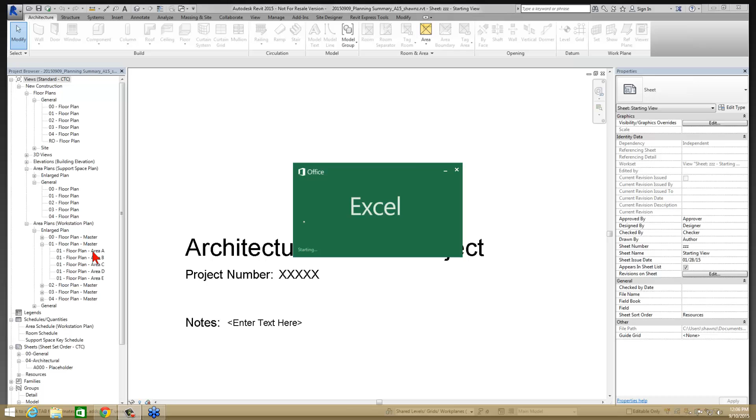Here I've got this single level summary of how many workstations I've got in my model. The intent here, I believe, is to size these workstations approximately to these square footage sizes. I've done that already in my Revit model—what I'm using actually is areas for this exercise.

I'm going to place a number of these around my model. I've got kind of a garbage model I've put together for today's purposes, and I can drop in as many of these as I want. My goal here is for the quantity on plan portion—I want to automatically extract this based on whatever individual workstation I'm dealing with, whether it's a little hoteling station, a small stand-up station, or other more refined types that are temporary, small, or more permanent office type spaces. So I want to get a quantity of how many I have in my project.

I also want to know how many have been put into my program—what is the client expecting for the quantity of those spaces? And then I want to know how I'm actually lining up with that, what my variance happens to be. This particular spreadsheet was, again, the one provided by my client—they formatted this.

Now down below, there's also some other types of supporting spaces. These are not necessarily workstations—these are actual square footages on rooms, I believe. So on the top portion I'm going to extract a quantity of how many spaces or workstations I have. On the bottom, I'm going to extract actual physical square footages, total square footages of individual space types.

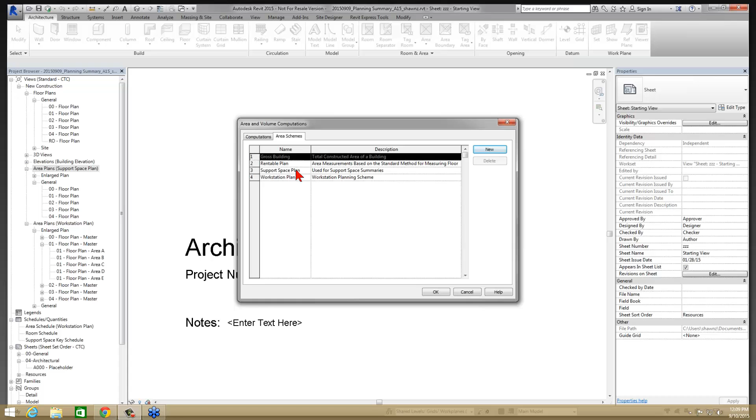What I have here is 2 different area plan types. I created this by going to Room and Area, Area and Volume Computations, and I created 2 area schemes. I created a support space plan. That particular plan is the information used by the square footage down here on the bottom.

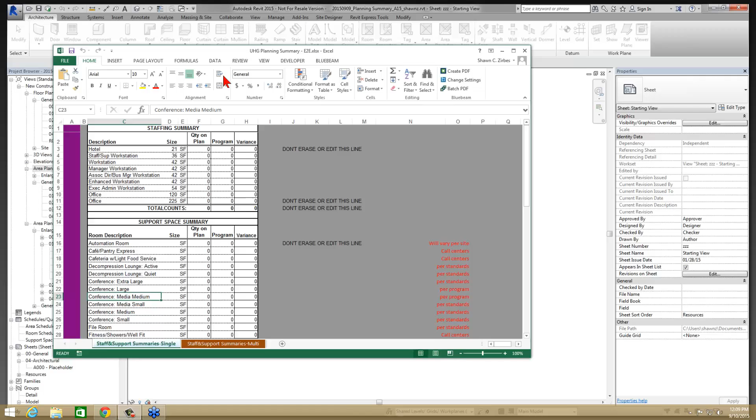The second one I created was a workstation plan. It's a different area plan, and it's very intentional—I created it differently. That's what's going to be used right here in my staffing summary for my quantities. Because they're areas, I can extract them all out to a single tab, and that's my intent. So those are my 2 different area schemes I'm working with today.

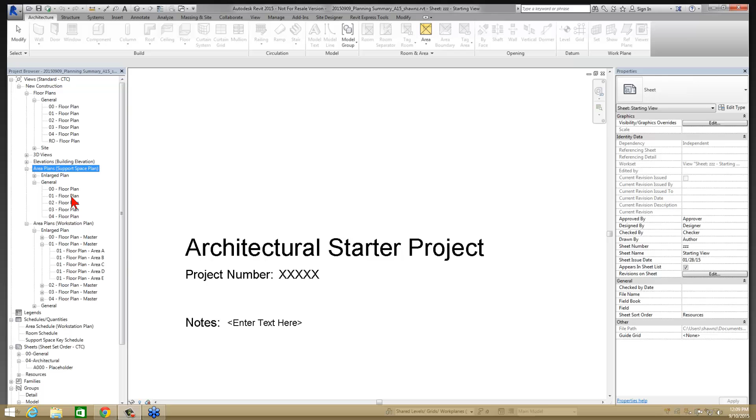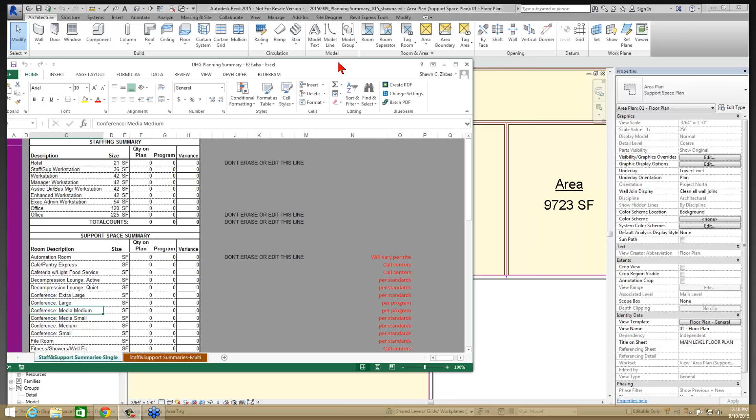I've already created the floor plans for this. Under my support space plan on level 1, I have a bunch of areas dropped out here, with names placed inside these different areas. If you look carefully, these names match up with the different types of names I've got out here—conference spaces, media medium, media small, large, or whatever type of space. In this case, conference medium, right down here.

I'm doing that with the schedule key inside of Revit. I've created a support space key schedule. My key is being used on the individual spaces themselves. Right here I am using my... no, sorry, wrong one. I'm using the area description right here—my area description is what I'm using.

As I change this, I have a preset list of area descriptions that matches up with my spreadsheet, and that drives what the actual name of the space or area happens to be. This is the value I'm going to use in my spreadsheet extraction—the name of the area consistently for both processes.

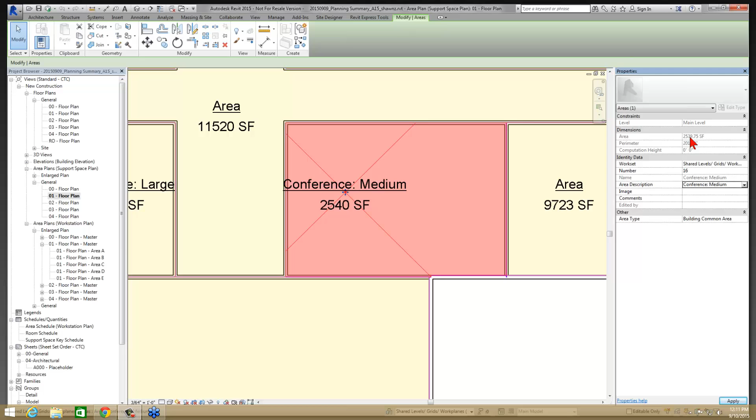I also have an actual square footage value in here, derived from whatever I've dropped this area into in my plan. So I've got some that are unnamed, just called area. I can refine those later on and make different choices—we'll see how that can work.

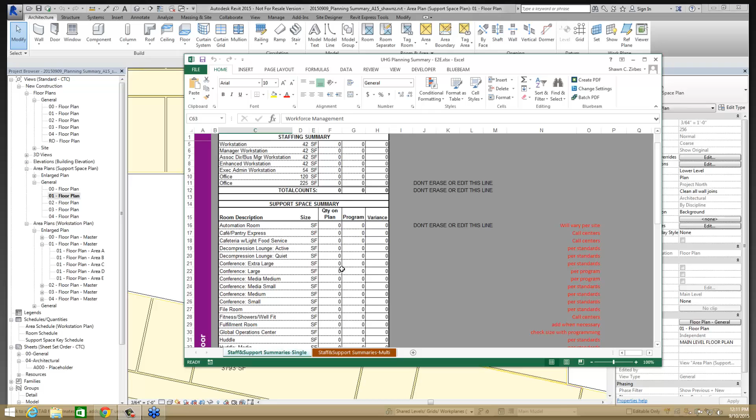I've got a huge lobby down here—I wasn't really checking the scale of this building as I was throwing it together. I've got a reception area, some workforce management, and all of those types of areas associate with these different support space summaries down here. So I've got things like lobby, workforce management—I've got those different types of areas down here, and I'm using this to extract these square footages on the lower portion and total them up.

Now on my other plan, I've got a workstation plan. What I've done is create some groups out here. If I look at these groups in my model groups, I've got like a workstation group, or an Office 2 type group, and those line up with some of the offices appearing in those different staffing summaries from my spreadsheet.

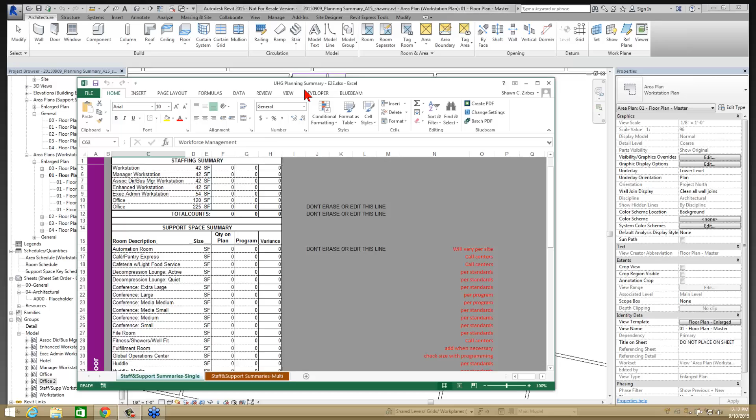Each of these individual groups line up and have a space inside them named the same as the individual staffing summary spaces for the different workstations. They have some boundary lines pre-included inside them. So I could simply take this hoteling station and drag and drop it into my project, drop it out there, and it actually creates the space itself—you can see an area inside there.

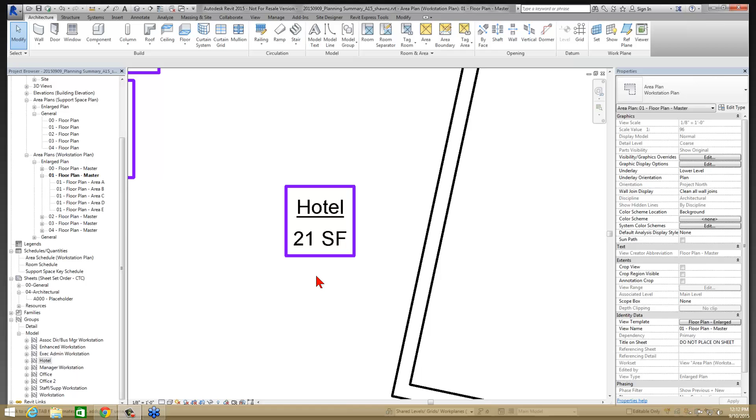It creates the boundary lines. It has a default size to it. I've also associated a group to this so I could have a tag pre-placed, so I can see this is a hotel station at approximately 21 square feet—matching up with what's in that spreadsheet. My intent was to make this as streamlined and smooth as possible for an end user to go out there and start bubble diagramming or dropping out specific workstations. For these ones, I don't care what the square footage is.

What I care about is how many of them I have in my project. So if I was to drop out an executive admin workstation, it's got a slightly different size. If I take office space number 2 and drop it out here randomly wherever I want, it has its own size and apparently a rotation as well, because I rotated it to match up with my building.

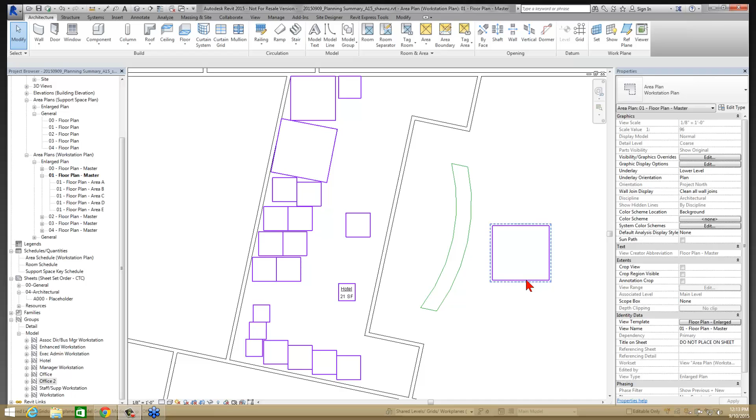So if I wanted to rotate this right now, kind of bring it back to square, take that and just rotate it to square, right? So I can do whatever I want with this. I can put these wherever I want, rotate them, get them placed. They all have, once again, different attached groups associated to them.

My goal here is ultimately to get a count of how many Office 2s or offices or whatever I actually have. Let's begin this extraction process now that I've taken you through what I have out here.

Now, some of these aren't labeled. I did that on purpose so you wouldn't be able to tell what they are. We're going to let Spreadsheet Link do all that totaling for us.

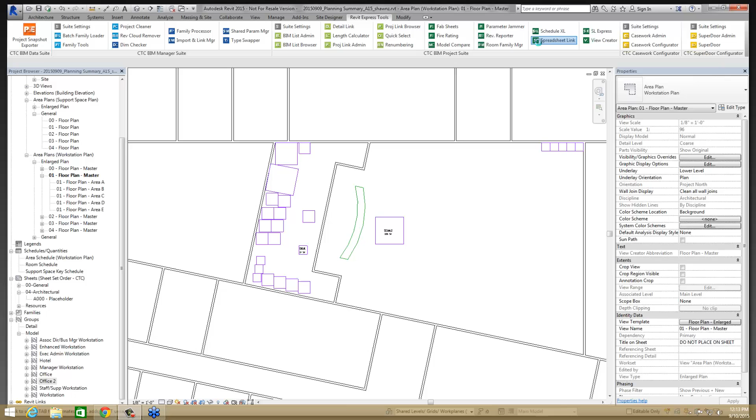So if I go over here to my Revit Express tools, my first step is going to be to open up Spreadsheet Link. In Spreadsheet Link, my second step is I'm going to open up a spreadsheet that's already been configured.

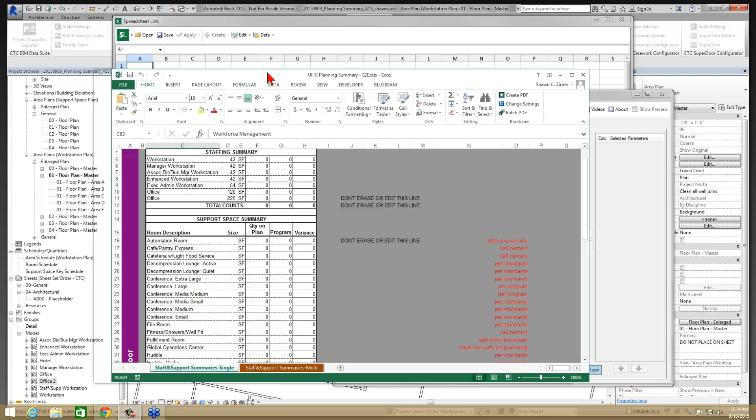So what I'm going to do is take that particular spreadsheet and do a quick save as on it. I'm going to take this UHG spreadsheet and save it, not save, save as, to my folder system out here.

I'm going to go to, where did I put this? Desktop. It's in my workflows folder, and I happen to have a folder set up for Spreadsheet Link called Planning Summary. Now I've already got a Planning Summary template sitting out here.

I'm going to steal this name and call it Planning Summary Template 2. We're going to come back and use this template in a minute to show you my automated workflow, since I probably won't get through the full configuration today for all the things I want to do, but I'll show you what the ultimate result happens to be if we don't get through it all. I'm going to go ahead and save this particular spreadsheet as template 2.

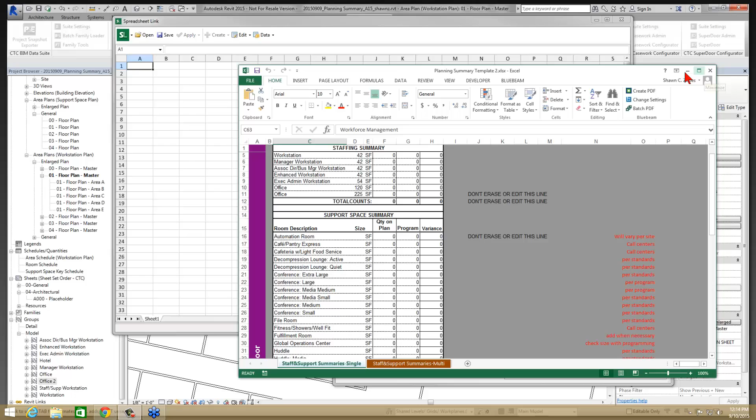I'm going to shut down my spreadsheet now, and over here I'm going to open it up inside of Spreadsheet Link. So let's go back to the workflows, Spreadsheet Link, Planning Summary, and I'm going to open up my template 2 here. Get that opened.

So what this is going to do is show me the 2 different individual tabs that already existed inside of there. And what I'm going to now do is begin my areas export. So here's my areas. I'm going to take that and export them out, create a tab for them right away. And there's a couple of values on these areas that I want.

I want the area scheme name. That's going to tell me if it's a support space or if it is a workstation, because I'm going to use different ones on these areas. I'm going to use the workstations on the top half up here. I'm going to use the support spaces down here on the bottom. So I want to be able to quantify which one it is I'm actually working with. That's why I'm pulling the area scheme name in.

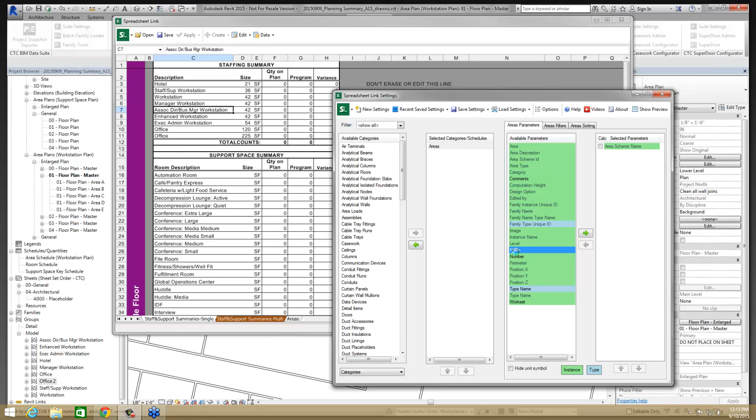Then what I'm going to care about is the actual name of the area itself, so whether it's a lobby or reception or whatever, or down here in the workstation plans, which type of workstation it happens to be. And then I also care about the square footage in the case of the support spaces down on the bottom here, so I can actually extract the square footage values as well if I want those.

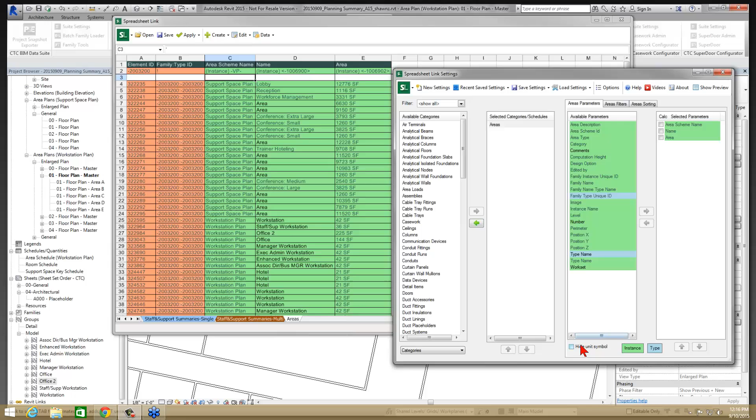Now when I'm dealing with the square footages, I do not want the SF suffix on it because I want just the value, just the number that's out there. So I'm going to hide the unit symbols. What that should let me do is actually get the areas, but not actually show me the square footage values.

Now, before I go too much further, what I'm going to do is save my settings using an advanced save. I'm just going to establish my settings file right now. So let's do an advanced save here. That pulls up this little window. I'm going to specify which template it is I want to open. So when I first pulled up Spreadsheet Link, my first step was to open up a spreadsheet.

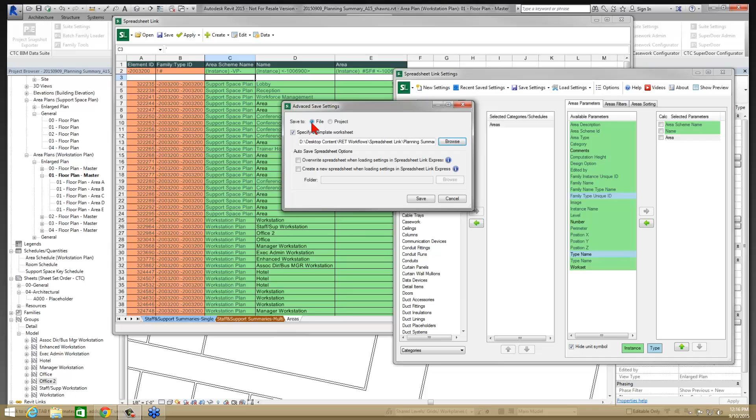So what I want to do is, now that I've got that opened, is browse and open up that same one, template number 2 here, get that opened. I'm going to save my settings specifically to a file, but also part of this process, if I was to run this using Spreadsheet Link Express, I would want to overwrite whatever spreadsheet it is I'm saving out so I can have a consistent spreadsheet per project.

And what this will do, this has a specific naming convention. It uses the file name and it uses the settings file name as part of the naming convention when it saves out this spreadsheet. And I can choose where I want it to go. So where I'm going to put this is out here inside of my computer, D drive, my sample folder, my Revit Express Tools workflows folder. I've got Spreadsheet Link, I've got my planning summary, and I have my planning results.

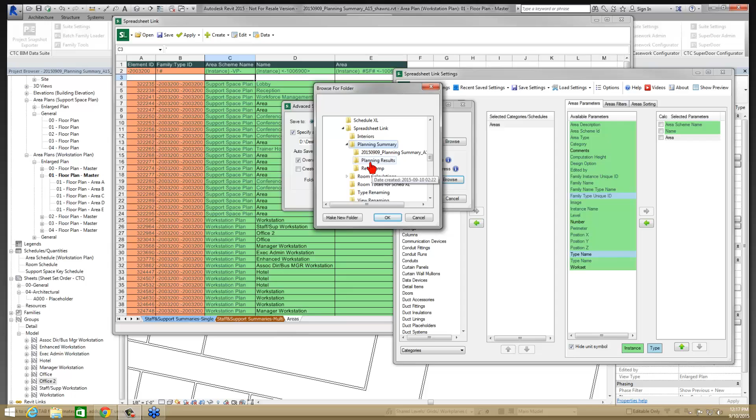This is where I'm going to be saving my spreadsheets. Right now, my planning results folder is completely empty. I'll show you that in a minute. But when I save, that's where I'm saving the file itself. That's good. That's the resulting Excel file when I'm done with this workflow is where that's going to get saved, in my planning results. I'm going to be taking this and call it planning results SLE2 to kind of match up with my other file name out there.

So I've saved my settings file, at least I've started to. Now just to test this process out real quick, I'm going to close my Spreadsheet Link settings. It wants to know if I want to save before closing. I'll answer no because I've already done it, but I'm going to close this down and fire up Spreadsheet Link and load my settings just to make sure everything loads in as it's supposed to. If a user was to work through this workflow, I want to make sure it loads up the spreadsheet first, extracts my areas second, adding it to that list, and then goes through the exercise of changing my units, and then I can do the rest of my lookup once I know this is working. So load settings from file, grab my Spreadsheet Link Express settings number 2 right here.

It's going to go ahead and extract my areas. Apparently not having my unit symbols is causing... no, it's not freaking out. It's just putting it over on the right side because now it's an integer or a number. So it's putting it on the right side there. I was just making sure that it did extract that area.

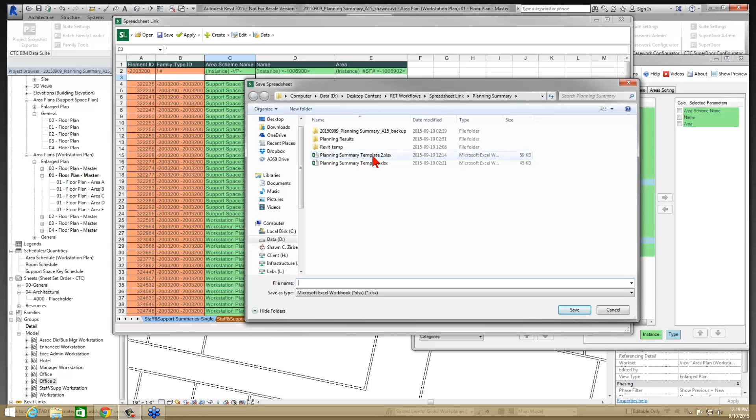So everything's working out. At this point, what I can do is go back to Excel and start writing lookups based on this. I'm going to save this spreadsheet out one more time as my template 2, because I want to make sure I've already got an areas tab. I want to make sure I've already got all my fields pre-figured out where they're going to be in my template so that my other tabs can look up from those in a consistent way. So I'm going to go ahead and save that out right now.

While this is happening, I'm going to take a look at my questions window here. I see I have a couple questions popping up. One of the questions is, can I populate the support space key schedule using Spreadsheet Link? And the answer right now is, unfortunately, not. I can't edit key schedules. I can see them and I can look information up from them, but with Spreadsheet Link right now, I can't add things to a key schedule. Working on that, it's a feature that's in the request list. If you want to add your voice to that, please go ahead and do that.

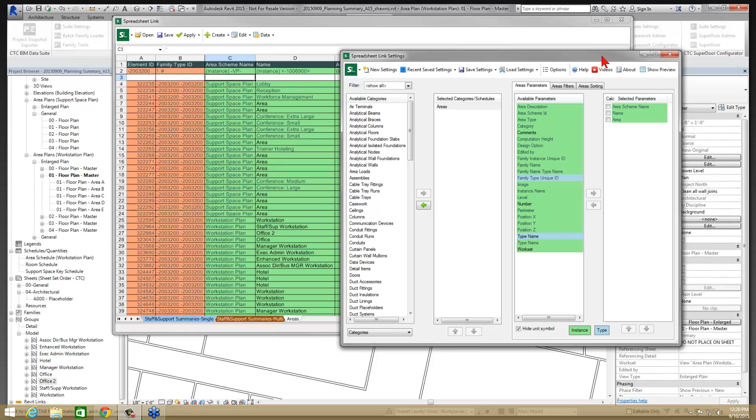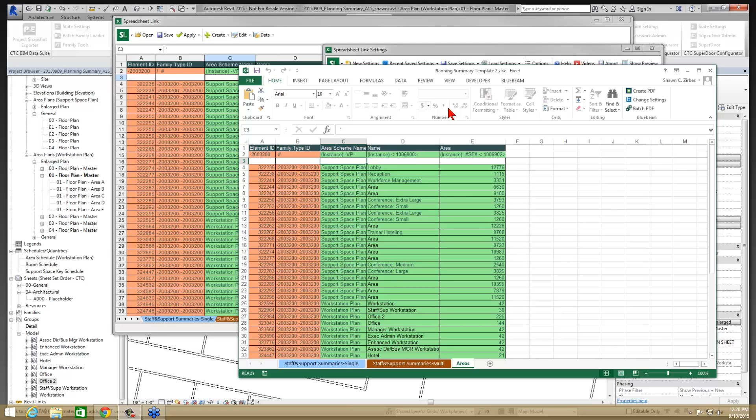Okay, I am back here in the Excel window now. This is the resulting saved template 2. I have some of my information from Revit pulled out here to my Areas tab. I'm going to go over to my Support Summaries single area and start doing some lookups from my Areas tab.

Now my lookups today are fairly simple. I'm looking up whether it's a support space or a workstation space, and what the name happens to be to make sure it matches up with the appropriate row in my previous tab. And if it's one of my support spaces, I want to get a total area on that. That's my goal here today.

I'm going to teach you a really cool trick I learned the other day on how to use a feature inside Excel to get either a count or a total quantity of something based on a formula. Before I go too far, let me explain it as I go through it.

So for the quantity on plan, this is what I'm trying to total up from this Areas tab. The first thing I want to do is make sure this is a workstation type group. I'm going to put a formula here, a special kind called SUMPRODUCT. SUMPRODUCT is really cool.

Whatever I put inside of it, I can give as many conditions as I want, and for each condition it returns either a 1, a 0, or an absolute value from a cell. It multiplies them all together, then proceeds to the next row, continuing to add row by row whatever the product was of each row.

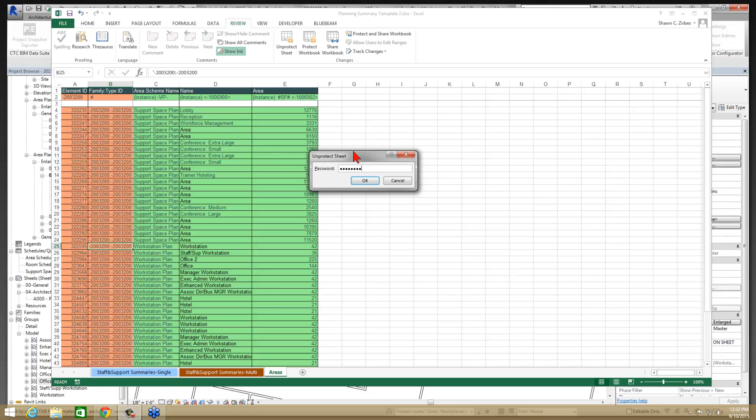In this case, I'm trying to create a template file here. So what I'm going to do is unprotect my sheet, type in the secret password. If you want to know what the secret password is, read the help documentation. It'll tell you exactly what the default password is. I'm not going to let you cheat right now and just get it from me, so read the help documentation.

I'm going to delete all these rows of information down here. That's okay, actually. It's not going to break any of my math because all of my math is column-based. There's no row references here on any of these formulas. It's all going on column-based.

No row references are coming out of this spreadsheet, this particular worksheet right here. So I can delete all those rows of information. I'm also going to take this area here where number 4 is, and clear the contents of these cells. That's going to make it completely blank. There's no reference to any specific element out there. All I have is my basic header data up here, the actual column references, so I can see what that is, and one row of blank data. Personal preference, that's how I like to have it set up.

So I'm going to go ahead and save my current planning summary template here.

Now, at this point, what I can do is actually run this against my project and see if it pulls this information properly in an automated fashion. So let's find out. I'm going to close down this Excel spreadsheet. I'm going to close down Spreadsheet Link.

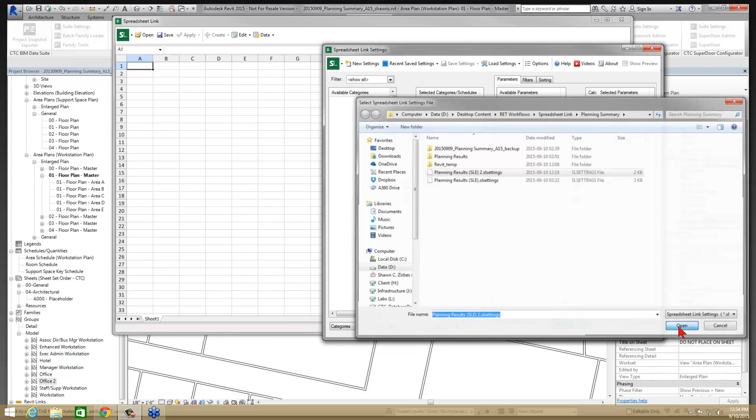I'm not going to save my changes beforehand because I've already done so. I'm going to open Spreadsheet Link back up again, and let's load these settings from a file. I've already got my export set up. All it has to do is pull the right spreadsheet. So as long as it does that when I load up this Spreadsheet Link Express number 2 right there, when I click open, it should open this all up right away, should extract my areas out here.

It's taking a second to go ahead and do that. It is going to ask me a question here telling me it's found the same worksheet and if I want to overwrite it, and the answer is yes, I do. So now as I've done that, it's got the exact same extraction of information out here.

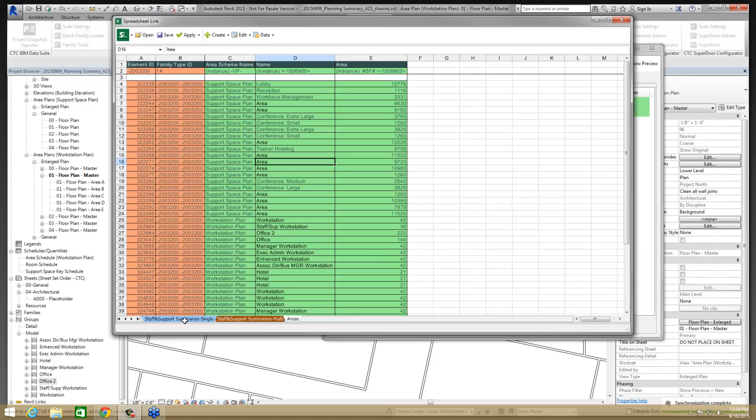If I go over here to my Staff and Support Summaries single tab, why is it not clicking over there? There we go. It took it a second to figure this out, probably because it was crunching the numbers over here. As it's doing that, it's going through and giving me the exact same counts, same 27 spaces, same actual extra large conference room space out there. All this information is the same, so it's good to go.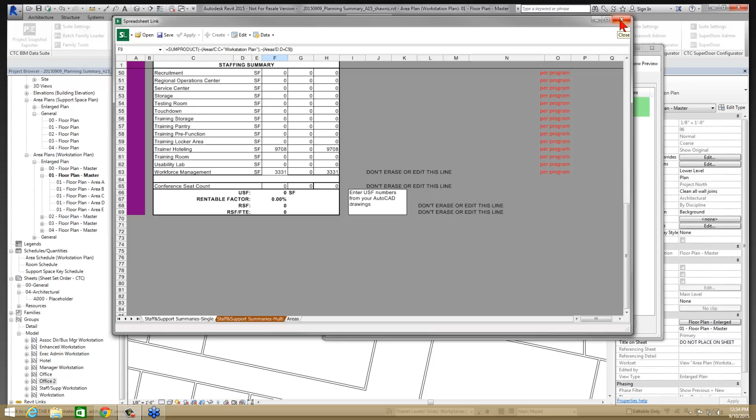So now, how do I use this? How does a designer go through the exercise of leveraging this? So what I would do is this: I'm going to close this down, give this off to a designer, and let them actually do some number crunching.

So they're going to take this file, they're going to go off with a client someplace. Let me pull this on the screen here. They're going to go off with a client. They're going to take, that's the wrong calculation set here. Let's do my planning summary. They're going to take this template off with them and go make changes to it.

Now I'm going to make a copy of this just in case they happen to overwrite mine when they come back to the office. But this is the one that my Spreadsheet Link process here, my settings file, is actually calling for. So they're going to have to overwrite this. So I'm definitely going to make sure I have a copy, or an XLTX file, or whatever, so I can have an actual template file that they can use. But they're going to have to overwrite this to run this process when they come back, unless I want to make individual settings files on a project-by-project basis.

That absolutely works. In fact, there's sometimes I'll do that to make sure that my resulting file, instead of being saved in a default network drive out here, it gets actually saved to a specific project folder. So I might actually make my settings file on a project-by-project basis. Maybe I don't even save the settings file out to an external file. Maybe I just save it in Spreadsheet Link with the advanced settings directly to my project file. That's a possibility as well.

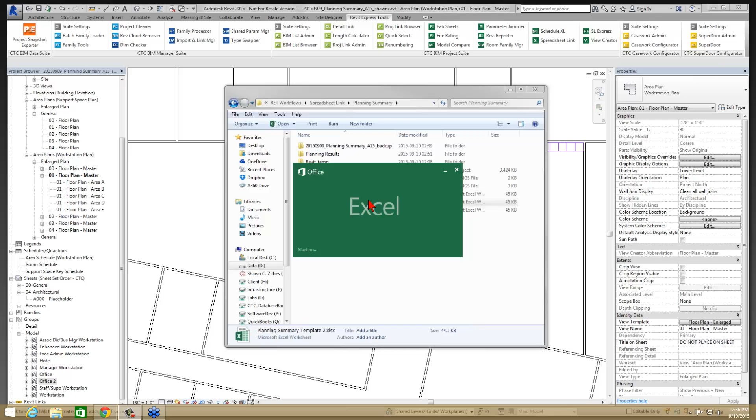But either way, they're going to go edit this file. They're going to go through the workflow here on the staff and support summaries single level project, go through the program tab, and say, okay, hoteling stations, how many do I want?

I want to have 12 of those in my project. How many actual workstations? I want to have maybe 14 of these. I want to have maybe 2 of these offices. This is actually office number 2, by the way—I failed to update that name. So I want to have 2 of those.

I want to have 4 of these basic offices. Maybe I want to have 3 of these. They're just sitting down with the client figuring out how many of these they want. Obviously, they're way under their count right now because they haven't actually run the design validation yet, but they're figuring out what they need.

How many manager workstations? I want 6 of those. So they can go through that exercise and fill that all out.

As far as the actual square footage of the individual spaces, I can go down here to something like the workforce management space and say, I'm expecting to have, as far as workforce management office area, maybe 1,200 square foot. And for the reception area out here, where was the reception?

It's in the R's if I read. There we go—reception over here, maybe I want to have 2,400 square feet, right? So I can put in whatever my numbers are that I expect to have for each of these areas and do some basic preliminary planning.

This might be a more simplified worksheet than what you're used to, but you can go through the exercise of filling these values out.

How much square footage for my extra large conference rooms do I want? I want to have 3,000 square foot of conference space across the entire building, perhaps the entire level 1. Maybe for my medium office space, I want to have 2,000 square foot of total conference space there. For my small conferences, maybe 1,000 square foot of those, or maybe 4,000 square foot.

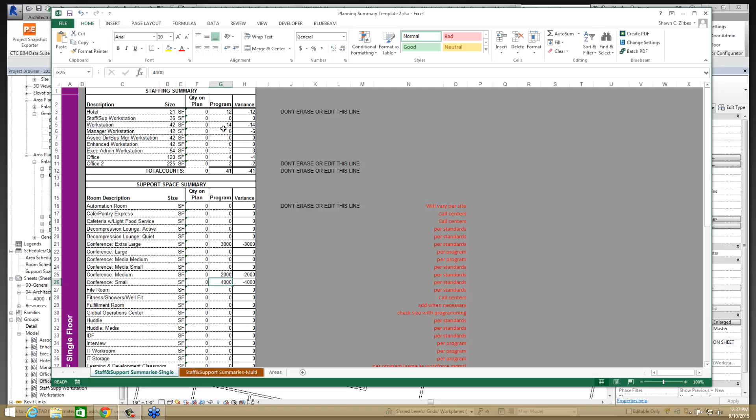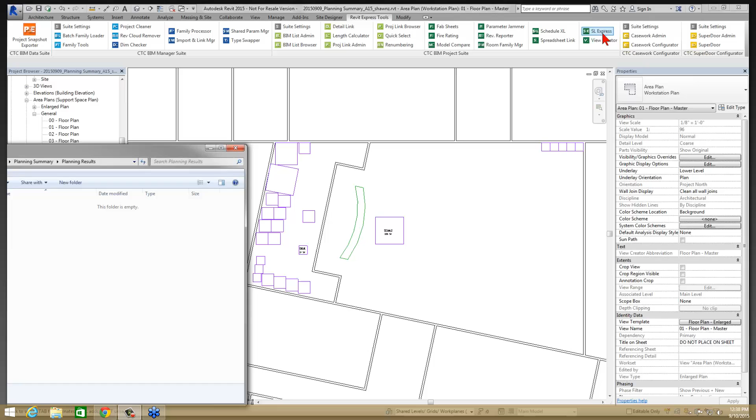I can save this. This is what the designer or the program developer is going to put together. Then when I go into Revit specifically, I'm going to use Spreadsheet Link Express for this workflow, and I'm going to have open here my planning results, so that when somebody comes back to the office with this and wants to run this against their design after the design's been done, to validate what's going on, I'm going to use Spreadsheet Link Express so I don't have to actually see the interface at all. So I'm going to use my planning results, Spreadsheet Link Express number 2 right here, apply my settings.

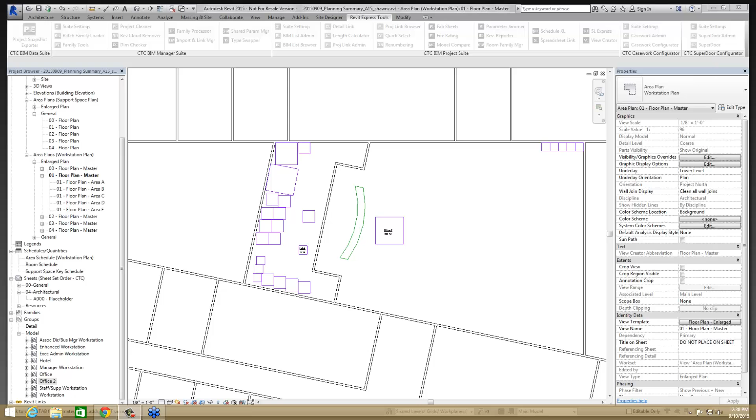It's going to go through the exercise of basically running data extraction. It's not going to change anything, so nothing's going to get imported. In fact, it's going to tell me that as well—nothing got imported. It's actually building up that file right here. It's not filled out yet. It's doing the actual pulling of the data.

It's filling it out. Ultimately, if I keep refreshing this here—there we go, refresh—there's 26K in file size. But over here, it says nothing is imported. That's because there are multiple tabs at the bottom. If I actually want something to import, I have to use the 'import_' name as a prefix to a tab, giving it the proper category. So nothing came back in. That's okay—I didn't want anything to come back in.

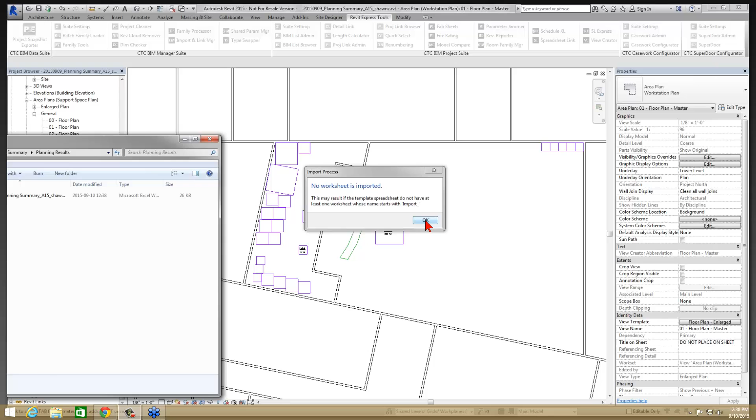All I wanted was my data to get extracted, which is what happened out here. This information got kicked out to a spreadsheet, and it named it based on my project and my Spreadsheet Link settings file—using the full name of my Revit project file, including my local copy name, then the settings file name, hyphenated together, giving me the full file name for my Excel file. So it saved it out to whatever folder I was expecting.

So now I've got this design information in here, and I'm starting to see my variance results. I'm seeing that I'm under the programmed quantity of hotel stations by 3. I'm over my staff support workstations by 1—I wasn't supposed to have any, actually. So I can go through and start seeing my design validation auto-extracted from Revit based on the area object, giving me a count of how many, or giving me a square footage. So you can go either way—it's up to you which way you want to go on this.

Either one is viable. I could have gone another level here on my areas and told it to pull the actual level my area was associated to. And then I could have used this multi-level configuration here where I've got first floor, second floor, third floor, fourth floor options, getting floor by floor totals, getting totals across the entire project, again using areas or using counts.

Either way works, same concept. You're doing one more check on this formula where I would basically say minus minus, open parenthesis, does my levels column equal level 1 or level 2 or level 3 or whatever, and then also check everything else, and then it would add that in the mix. If it's not the right level, it doesn't give me the right product because it would be a 0 - it zeroes out the entire row. If anything in this row is a 0 when it multiplies, the whole entire row sums as a 0. So that's kind of how that little workflow works there.

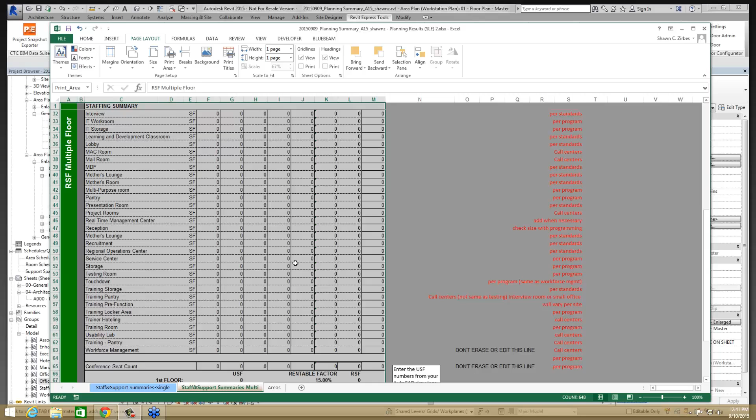Same thing over here. I've already set a print area here, so it's going to use all of this as my print area. That goes all the way to the bottom of what I actually want to include. So I've done set print area already - that's already been done, I don't have to save this. It's already been taken care of in my template file. That was something I did ahead of time.

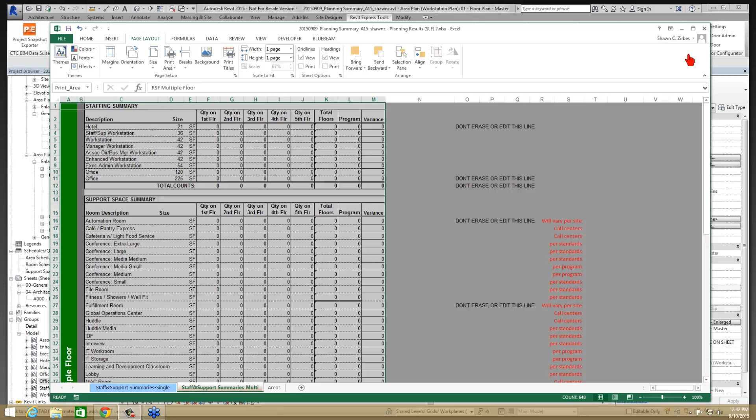So what I can do now - I didn't make any changes here, I'm just going to leave it as it is. This file is going to get linked into my Revit project. That one tab is going to get brought in using Schedule XL. Now, when I bring that one tab in, the next time somebody reruns data validation, if there's more hoteling stations out here, I can go back to Schedule XL and simply re-update this, no problem. Or as I open up my project, it'll automatically update, because that's how Schedule XL happens to work. So let's go through the exercise of bringing that in.

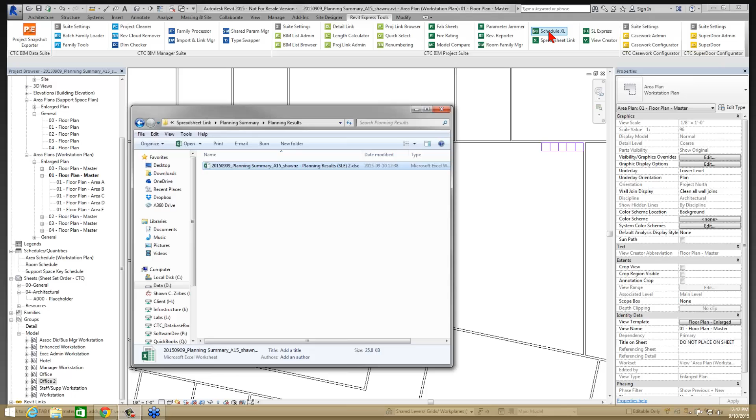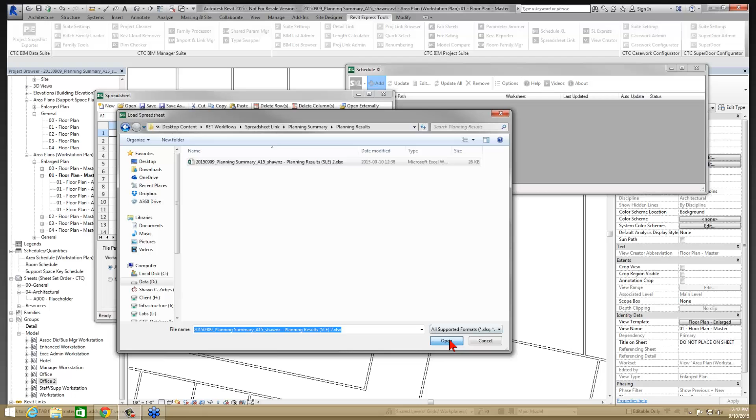If I go here to Schedule XL, I'm going to add in and open up that particular spreadsheet. So let's go to planning results - here's my planning results right here using the file name from my project and using the settings file from my Schedule XL or spreadsheet link workflow. Grab that file, open it up. It's going to give me the 3 tabs that I've got out here: here's my areas, here's my summaries for my multi-floor, and here's my single floor summaries. This is the one that I want, my single floor summaries. So I'm going to go ahead and click OK on this.

That's going to bring in this one schedule, and I'm going to show you now the one limitation that Revit apparently has when we build up this schedule inside of here. In my spreadsheet, this one value over here was rotated 90 degrees, and apparently inside of Revit schedules we can't rotate text. So you might want to be a little bit careful about having vertical or angled text, because Schedule XL cannot recreate rotated text at this time. I'm going to look into it, see if we can find a good resolution for that. But for now it doesn't do rotated text, so this looks a little goofy. But everything else out here is giving me the results right back from whatever I did inside of Excel.

So at this point, if I rerun my analysis, I can get this to re-update inside of Revit. Let's do an example of that.

If I go over here to area D, I want to place a couple of workstations. I have no idea which ones these are, so I'm going to copy them around anyway. I'll drop some here, copy this around, drop some down here. I'll take these two, whatever they are, and swap them out for office spaces.

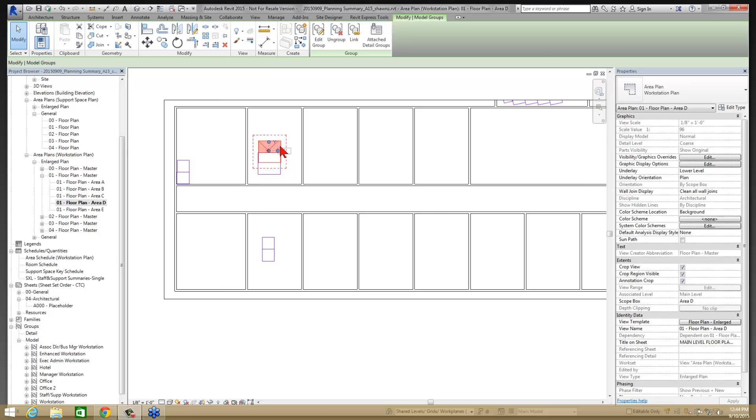They'll get much larger, change their sizes, no big deal. I'm going to move them around a little bit so they're not overlapping, so I get actual areas out there. I'll take this guy here and move this workstation off in this direction.

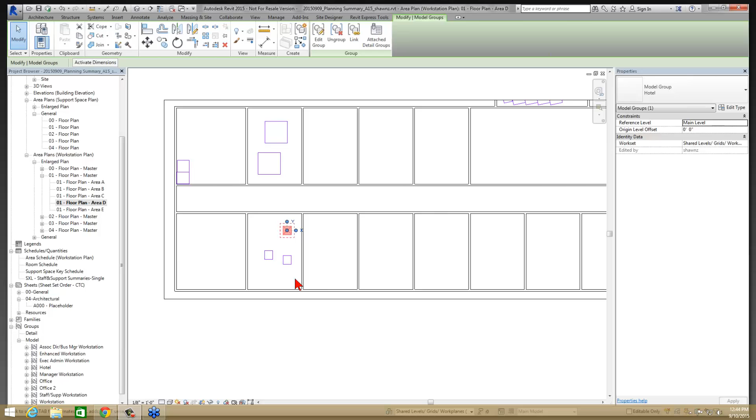Let's make this a hoteling station. I'm going to try and get the quantities of hotels that I need. I was under by 3, so I'll go ahead and make 3 more hoteling stations out here. We'll copy this guy — doesn't really matter where I put it. The whole point is that I can quantify the fact that it exists.

I'm going to take these 2 and copy them one more time. Copy. We'll put them over here in this little space, and make those some more enhanced workstations. I don't think I had those in my list at all, so now I have some more enhanced workstations here.

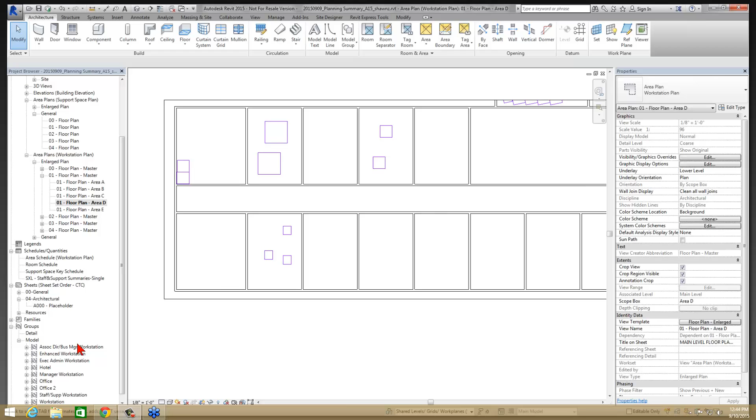Let's go take a look at what those numbers currently look like. Right now my enhanced workstation is number 3. I've got 1 office space, 2 office spaces, 2s. So I've got some basic numbers here.

What I'm going to do is start by going to my Revit Express tools, run my Spreadsheet Link Express workflow, load up my settings from that planning summary folder for settings number 2 here, and just apply them. The process here is it's going to re-extract that spreadsheet, and that's going to get kicked out. Wait for it, it takes a second — it's got to extract all this information, run the calculations, and save the spreadsheet, so it sometimes takes a little bit here.

No worksheet was imported — that's okay, I didn't want it to be, so nothing got changed inside of Revit. Now keep an eye on these numbers right here. I'm going to re-update from Schedule XL. This happens to be out of date because the outside spreadsheet had been modified, so I'm going to update it. As I update this, it's going to rerun the numbers here and pull the new information in. This should be 12 with a 0 variance. Everything else out there is going to run its calculations as expected and give me some new totals out here. There we go, updated information.

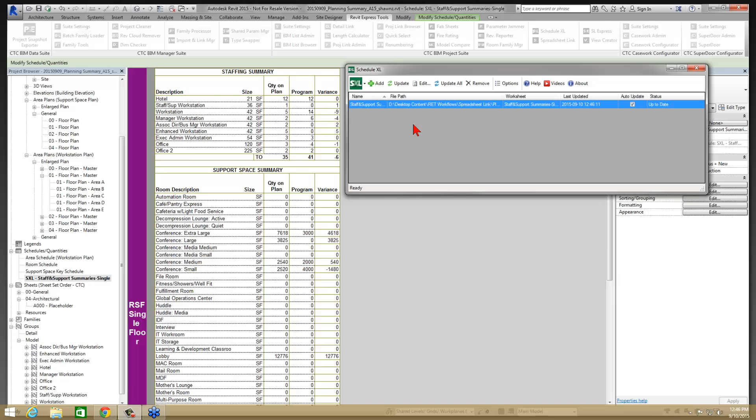So in a matter of 45 minutes, we went through, while talking about it, and figured out how to take data from Revit, export it out, get quantities or total square footage on a space or area-by-area basis. We also formatted a spreadsheet that was provided either by a client or by whomever, by internal formatting, and brought that right back into Revit with the results.

So you can see here, we've got some pretty significant power that you can do for design validation, and this can be used for a lot of different workflows. I can use this electrically, mechanically, obviously architecturally in this example. There's a lot of ways this can be leveraged.

There was a question that just popped in a second ago: if you had conditional formatting to highlight some variance in this program summary, would that be maintained? The answer is yes. It wouldn't necessarily show inside Spreadsheet Link directly because it doesn't calculate out those conditional formats. But when you open it up inside Excel, because this is just an XLS file, any conditional formatting would definitely take effect there and would show up in the Excel spreadsheet, which would then also update inside Schedule XL, so my conditional formatting could show up here. If I have a variance greater than 1 or whatever, it could highlight these cells over here. Yeah, I can definitely use conditional formatting — I didn't turn that on here, but that'd be a very interesting exercise sometime soon. You could definitely leverage that.

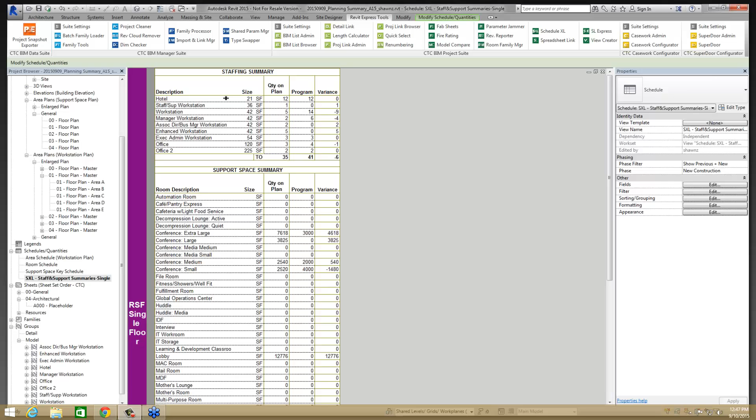I've used that before on other examples. Obviously colors come through, so I can background infill cells like this cell over here. It would just be up to me to make sure I've got those conditional formats put in place properly. And since this tab here isn't actually doing any changing, I don't have to worry about propagating extra conditional formats on additional rows that would show up here, because these rows are pretty fixed based on how this particular spreadsheet is set up.